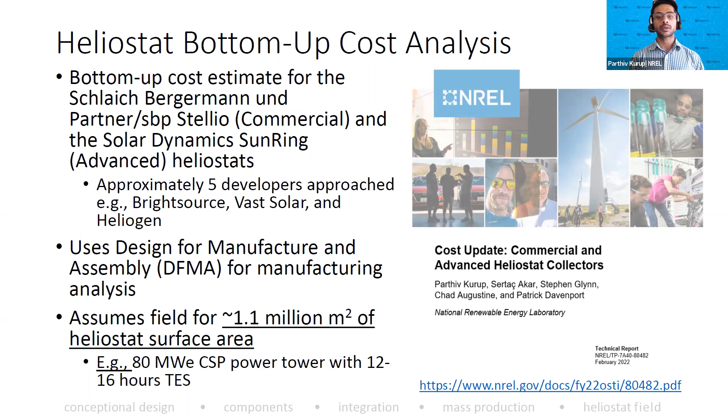Starting with what was considered the commercial heliostat, the Stellio, it has been designed and developed in a consortium, primarily through European developers and research institutes. Within 5 years, this heliostat has gone from testing and development into the field itself. For example, right now it is deployed at the Hami Chinese CSP power tower plant in the Xinjiang province near Mongolia. It's a 50 megawatt electric plant with 8 hours of molten salt storage, operational for the last few years.

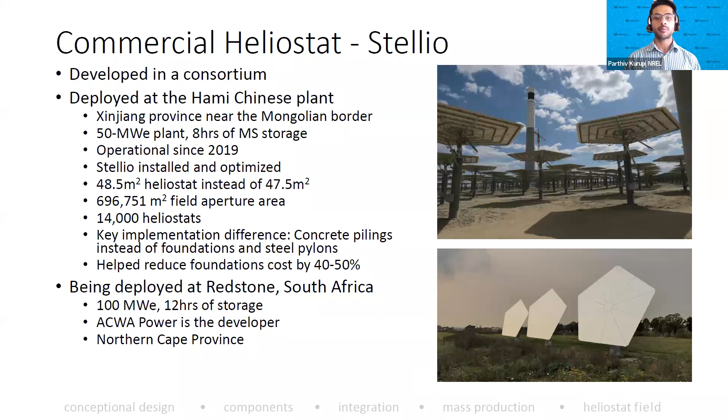When we look at the design for the Stellio, it's quite a novel design because of its pentagonal shape. The image you're seeing shows the back face of the structure and the linear actuators. It's a steel frame design, and the foundation, as I mentioned, can either be steel and concrete or driven piles. In the current analysis, the Stellio uses 4 millimeter glass, and each heliostat has an approximate aperture area of about 48.5 meters squared. For this large million meter squared heliostat field, it's about 22,239 heliostats. So when you look at the design and the shape, again, it's very interesting and very novel.

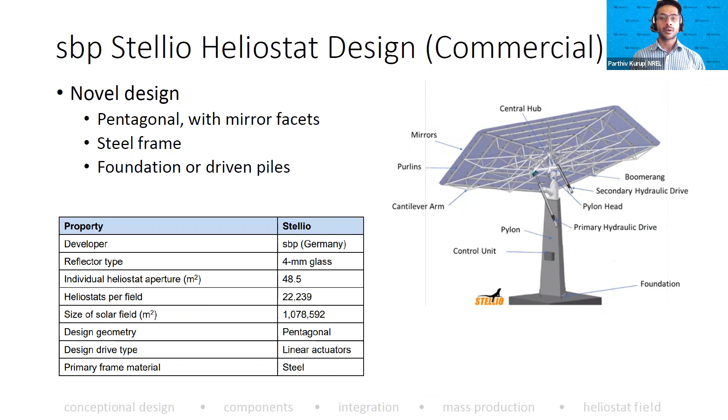Similarly, the advanced design, the other design that's compared or used in the analysis, is the SunRing from Solar Dynamics. As you can see, this is a more standard rectangular design, and it's actually the evolution of the Abengoa ring of power design. This design incorporates an increased aperture area and improved structure and stiffness compared to that. It has a simpler facet design, and as you can see in the image, there's actually a PV panel which also helps control the movement as well.

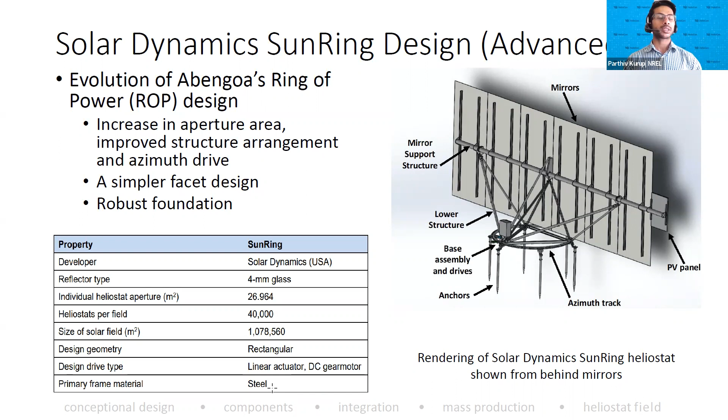For the analysis, again, 4 millimeter glass is used, and compared to the Stellio, these are actually 27 meters squared instead of about 48.5 meters squared per heliostat, and there are 40,000 of these in the field, leading to approximately 1 million meters squared. The similarity between the two designs is also that both are significant users of steel, and that'll come out in some of the analysis later as well.

As part of the methodology for the analysis, it's important to mention both the tools and how they've been used. Design for Manufacturing and Assembly, DFMA, is an industrial software tool developed by Boothroyd Dewhurst, and it's really incredible for what it can do in terms of the manufacturing and assembly costs for components and subcomponents as well. NREL has utilized DFMA for other technologies as well, such as small hydropower, modular thermal energy storage, geothermal turbines, and also advanced metal extrusions. You can go to the reports on those designs as well.

DFMA is made up of two main parts, design for manufacturing and design for assembly. Design for manufacturing is built upon detailed databases of material properties and machine capabilities, which allows the knowledgeable user to calculate the primary manufacturing cost for every single component and then assemble that into an overall product. It comes up with something called a should cost. That should cost is based on the material, the process steps, the manufacturing, the setup time, and the tooling investment if needed. For example, a low carbon steel would have a lower dollar per pound cost than a high carbon steel or a tooling steel.

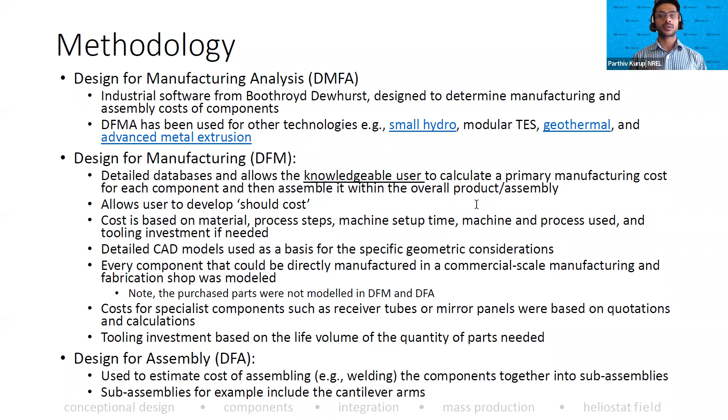When we look at the methodology from manufacturing up to construction and install costs, it's really important that the bill of materials is incredibly detailed. The bill of materials starts from the design, incorporating CAD models, then specific numbers of components per heliostat, and then of course multiplied by the number of heliostats for the field. In the bill of materials, we would want to include all the metal components, then mirrors, drives and fasteners in the purchase parts, and then work up to the next level of assembly and also construction.

For both designs, we got a significant amount of support from the manufacturers and developers to determine what their estimated construction cost could be for that size of plant, and also what sort of site assembly facility would be needed. Eventually we come to an installed cost, which includes the manufacturing, the subassembly, the purchase, the construction, and field costs as well.

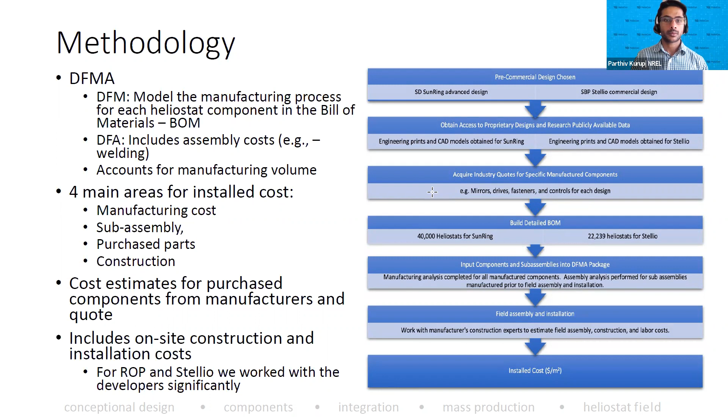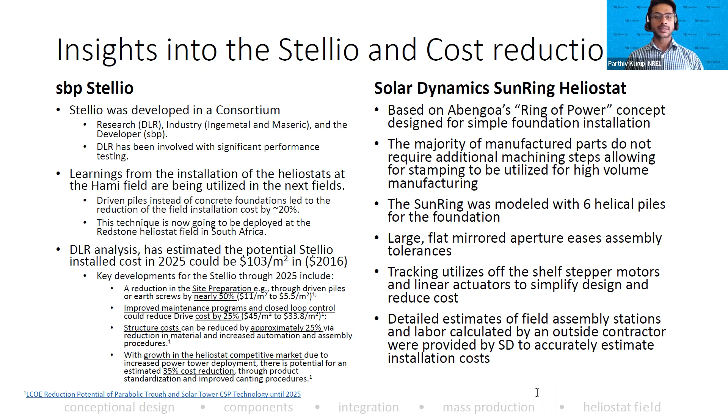In summary, the report can be found at the NREL link. And again, the major result was the estimated heliostat installed cost at $127 per meter squared, and the advanced heliostat at around $96 per meter squared when realized. The $127 per meter squared feeds into the Annual Technology Baseline, the ATB 22, to then help with the cost projections into the future. This type of analysis also feeds into the supply chain analysis, which I'll highlight next. And this type of key bottom-up analysis really shows the design and development perspective towards $75 per meter squared and even $50 per meter squared.

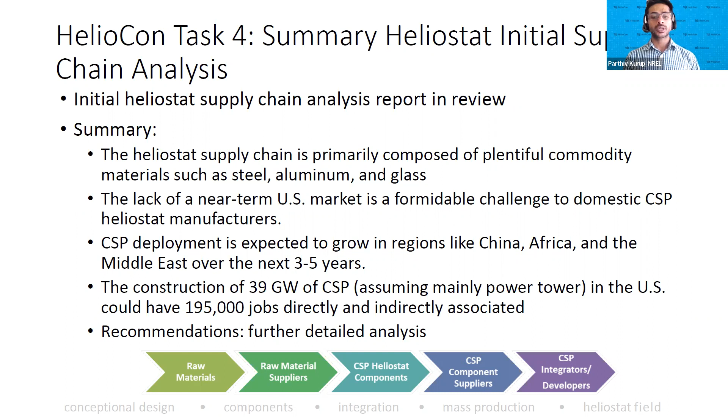So again, when this report is published, you'll be able to see this in greater detail, but I wanted to provide a snapshot of some of the analysis. So here, for example, this is the material content analysis, and in the metric ton column, you're seeing the amount, the metric ton effectively, of that material, so glass, steel, for a heliostat field of about 1 million meters squared.

And so you then compare that with the annual production of that commodity material in the US. So for example, in 2020, glass in the US has about a 20 million metric ton capacity. Therefore, you can figure out how much of the US production would be utilized in producing one heliostat field, for example. And then it leads to an estimated market value of the amount of commodity material used in the commercial design and the advanced design, and similarly in the steel case for the commercial and advanced as well.

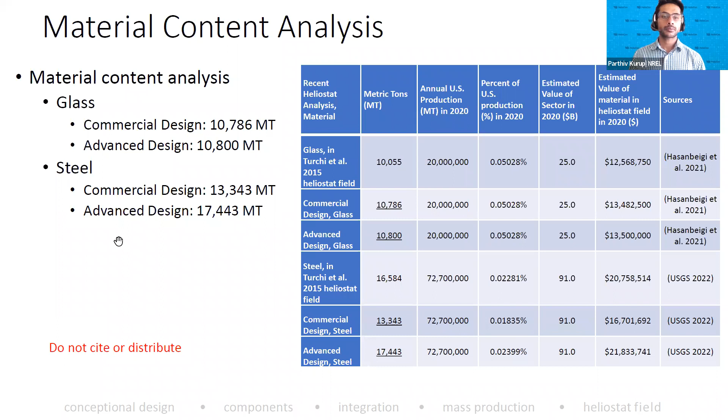So from this type of material content analysis, you can find out or estimate jobs potentially linked with one heliostat field. So for example, comparing it to prior analysis in 2015, we can see that the amount of direct and indirect jobs relative to earlier was about the same. But for example, when we look at the glass side, the number of jobs does change slightly compared to prior design. So here we're looking at the direct and indirect jobs for one heliostat field.

So for example, in the commercial design in the US, we estimated around 94 jobs could be created and utilized based upon the market and the size of the glass industry in the US. So in the US in 2020, about 87,000 to 88,000 jobs were associated. And so you can work out how many jobs could be associated with a field. When you look at it from one field to 100 fields to 1,000 fields, then the numbers of jobs become much

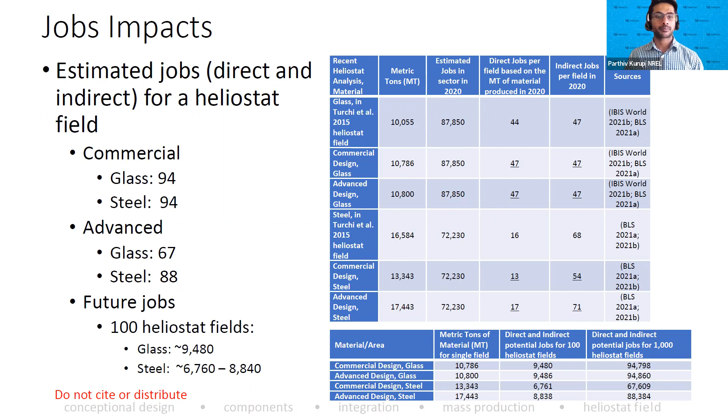As part of this analysis, and also analysis that's been done by NREL and other labs, the Solar Futures Study is a really key potential outlook of what solar could do for the US. And the numbers shown in the table are related to PV. So the gigawatts of solar PV deployed from now until 2035 and then 2050. And there are three main scenarios which are of importance. The reference scenario, where in today's conditions, things are improving and being deployed, a decarbonization scenario where 95% of the grid is effectively decarbonized relative to prior baselines, and then the decarbonization plus electrification scenario where even more is

required. So when you look at the emissions reduction targets and potential, even in the reference scenario, there is an expectation there could be a 45% reduction in emissions using solar PV and wind at the current rates of deployment. But if the decarbonization scenario can be hit, a 95% reduction in emissions could occur through solar PV and wind, for example. This, of course, has a phenomenal impact on the deployment of PV.

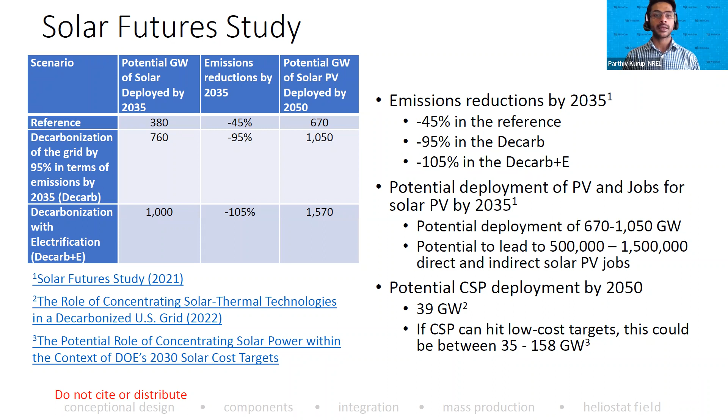So in the heliostat supply chain analysis, we also looked at some of the impact on the Annual Technology Baseline. The ATB 2022 has utilized some of the cost data that we found in the original heliostat bottom-up analysis, and it's then reported in the heliostat supply chain analysis. The ATB 2022, which is being finalized and will be released shortly, uses 2020 as the start point.

And so in 2020, the estimated CSP overnight capital cost, or the OCC, without additions for things like finance costs, was around $6,242 per kilowatt electric. And of course, that includes the turbine, the storage, and the solar field capital cost components as well.

By 2035, in the moderate scenario, based upon literature projections and based upon how the NREL mid projection has been shown and done, the estimates are around $4,069 per kilowatt, going down to perhaps $3,100 per kilowatt electric in the advanced low-cost scenario.

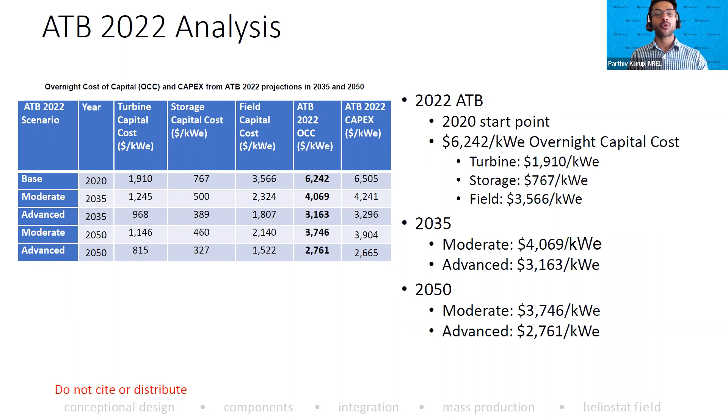When the supply chain in the US is looked at, and also globally for heliostats, there are some key challenges that really need to be addressed and overcome. For example, heliostats are complex parts and structures, but there is a scale associated with manufacturing them to be able to get cost reductions.

A really key challenge for heliostat manufacturing, not only in the US but also outside, is the inconsistent demand pipeline. It's really critical that a consistent pipeline exists where manufacturers know that they can supply into markets and projects that are being built. If you have the situation like currently where you have start, stop, and huge ramp ups in production and then ramp down, it's going to lead to large difficulties in establishing the supply chain as well.

Of course, we've lived through the last few years, and global supply chain disruptions have affected commodities, but also transport and components. So that's a significant short-term challenge present in pretty much all markets. And as I mentioned at the beginning, there are some pretty uncertain US perspectives on the pipeline and the amount of CSP that could be deployed in the next 3 or 5 years, which then helps spur manufacturing.

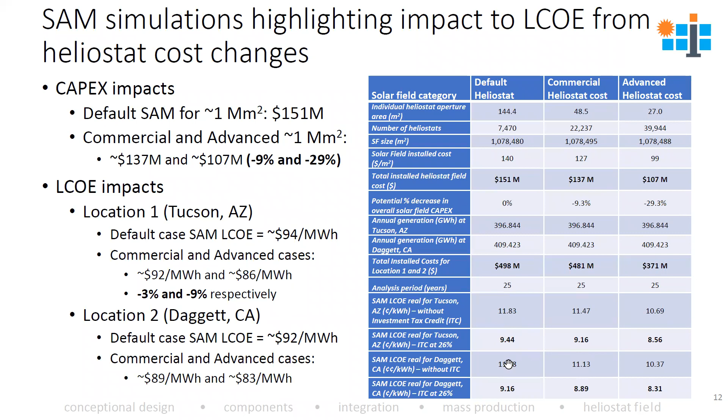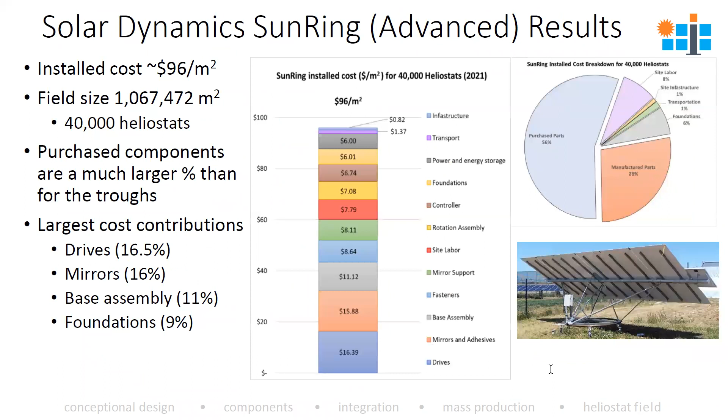Okay, so my question is about mass manufacturing, and we talk about manufacturing at scale. Based off this study, would you say that a single large plant provides enough demand for heliostat parts that it would qualify as mass manufacturing? Or is there even more cost reductions possible if you were to know that you were going to do multiple plants, let's say? Or you knew that there was a good pipeline coming for the next 10 years? Absolutely.

So, for example, even one field for a region or a locality can be considered large manufacturing, but absolutely you want to have multiple of these coming online so that one area or one manufacturer is not the only one who has the knowledge of this. So this is the assumption that an established manufacturer can take a piece like this based on the stamping produced and then get to higher volumes and lower costs. But depending on the process used, for example stamping or roll forming, you could even get much lower costs.

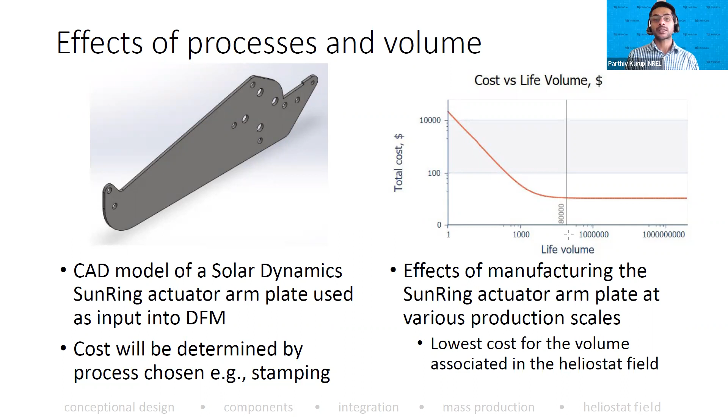And so you would be able to utilize the machines of that shop to be able to produce 80,000. But for one plant, it's unlikely that you would build a manufacturing facility, but you would build an assembly facility. So for example, here, this specific case assumed one assembly line facility adjacent to the solar field.

Now, if you're building more than one field, you would want to build multiple assembly facilities, which would then reduce the amount of time for building the fields. So for example, we know that SBP designed with the perspective of multiple fields, same for Solar Dynamics, so that you can take equipment from one site and even shift it to another assembly site.

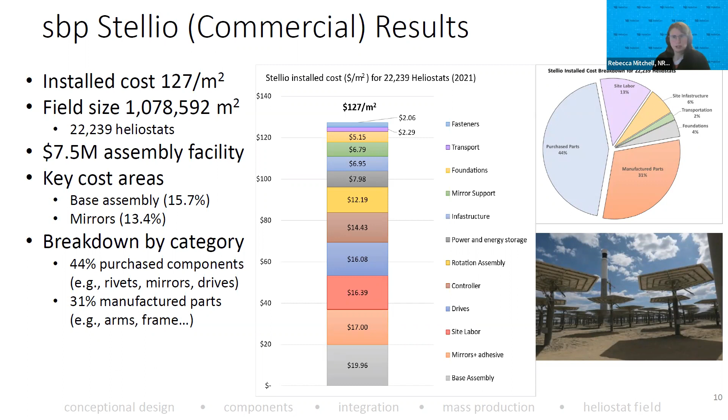Yeah, great question, Chad. Thank you. Is anyone else's hand up? I'm not sure if I can see. No, I think just Chad from his question before. Great, we have time for a few more questions if anyone has some. Check the chat, see if there's anything else there. Rebecca, I've got one if no one else. Yeah, go ahead.

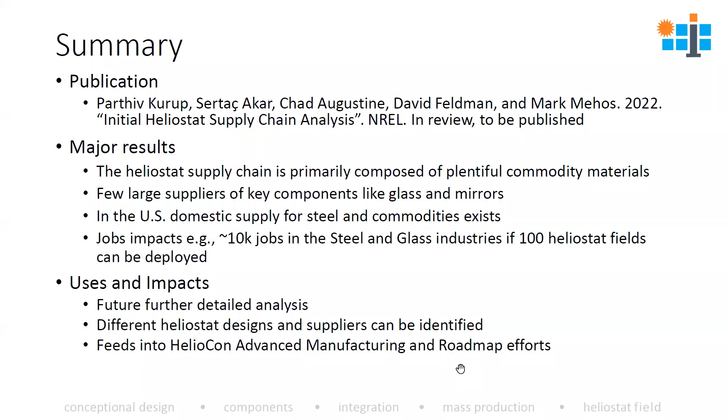So Parthiv, you broke out the cost of both the SBP and the advanced heliostat into, I want to say, over a dozen individual components. Does the pathway to bring the cost down to 75 or 50 or any other number per meter squared look like a pretty proportional reduction in all of those, or kind of a leaps and bounds improvement in a few areas? Yeah, great question.

So I know Alex is also on, and perhaps Jeremy, but not every area is going to reduce proportionately, because, for example, if you look at any design, the amount of material is always going to be a constraining minimum. You can't have, let's say, steel at zero cost, right? Sure. But things like drives, things like mirrors, you can apply supply chain improvements, but also much better negotiated contracts.

So for example, the current fields on the Dubai Electricity and Water plant, which is a huge field, right? 600 megawatts parabolic trough, 100 megawatts of heliostat. We know through discussions with the developers that these types of components like the mirrors and the drives have had significant supply chain pressure and procurement pressure. So there are some non-linearities. You're absolutely right.

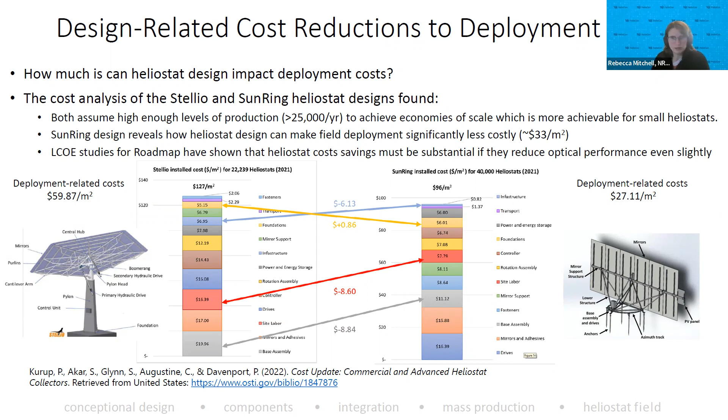Thanks, Parthiv. Great talk. Thank you. Thanks, Dan. So probably time for one or two final questions if anyone has them. All right. With that, Parthiv, do you want to go ahead and navigate to your last slide? Thanks so much, Rebecca. Yeah, thanks, Parthiv, for a really nice talk.